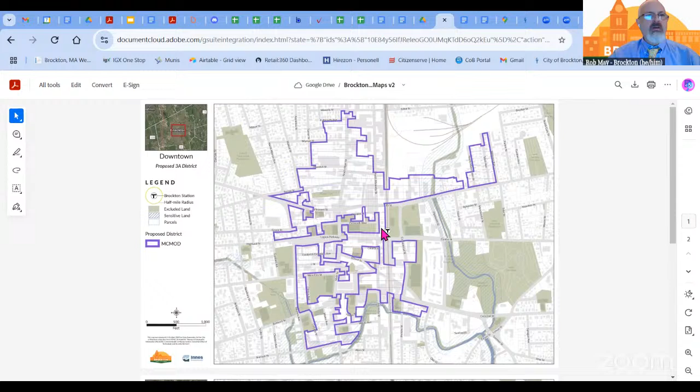And then in the Campello neighborhood, here you see the MBTA commuter rail station. And again, along in Campello, between Warren Avenue and the tracks on the east side. And then there's some property that spills over on the other side of the river, or other side of the tracks. Walkover Commons is right here to give you an idea of where we are. And this is the area south of Perkins Street.

Okay, so my question would be, let's just say as we move on with this, and even this is very similar to the form-based, correct, Rob? Essentially just doesn't have all the bells and whistles. The maps, yes, that's correct. So, what if we slowly start identifying other areas? How fluid are these boundaries? These boundaries will bring us into 100% compliance with the Commonwealth. We will meet our targets.

Form-based code, on the other hand, is something that is bigger and better. And so not only will we have downtown, the downtown Trout Brook and the Campello and the Southern Main Street corridor, we'll also see large chunks of the Montello area rezoned for form-based code, hopefully, and an area that we call Lovett Brook, which is the land around the Good Samaritan Hospital. The form-based code is written in such a way that it can be mapped in multiple areas in the city of Brockton, not just downtown. Okay, but right now we're just talking about the overlay district at this point. So that's what's in front of you this evening.

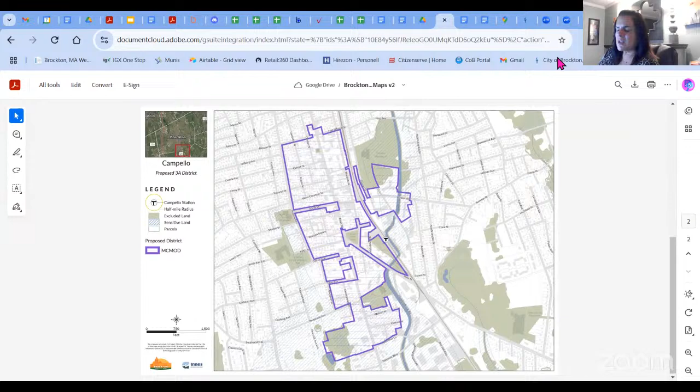Great idea, Jim. Thank you. Yeah, you come up with some good ones, Jim.

Appreciate it. Now, you said any additions or changes have to be added now, but you said that Montello would come in in the spring? Is that noted in this plan? No, to the overlay district, before council votes on it. If we would like to put the overlay district onto Montello, that would be a separate ordinance. And we could do that in the future, or we can wait until we map the Montello district for form-based code and come back at that later this spring. Okay.

All right, and the reason why there's a delay is that we started the planning process later, but the state has funded us to do the planning in that neighborhood. And we're doing a very extensive outreach to the community, have had several public meetings so far, and have gotten some really good community participation, which is what we want, because this master plan and the zoning should reflect what the community wants, and we're getting there rather quickly.

Okay. Any other questions from the board before we open up to public? Not me. All right, anybody with their hands raised? Madam Chair, we did take public testimony at the last meeting. I don't know if we didn't close the public testimony portion, but if people would like to make public testimony regarding the MBTA Communities Overlay District, please use the raise your hand icon, and we will unlock your mic and take comments at that time.

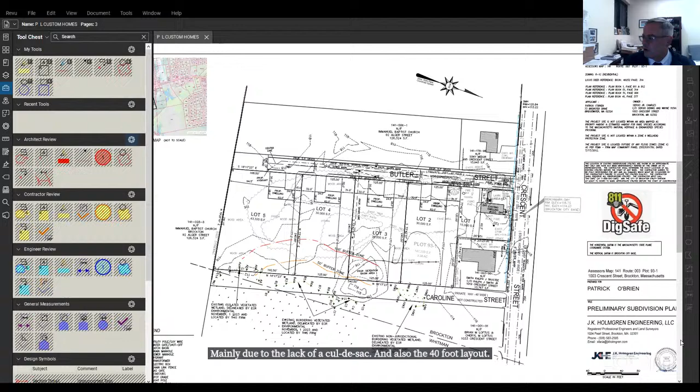So the plan that you see before you was the original plan that you folks gave us a blessing that held the 40-foot layout of Butler Street right across the top. We created 5 lots. The ZBA wasn't happy with it, mainly due to the lack of a cul-de-sac and also the 40-foot layout. We heard what they said and came back with this plan here that now has a 50-foot layout, still encompassing the existing Butler Street layout, but now widens it to a 50-foot and proposes a cul-de-sac. The lots are still substandard. They still have 125 feet of frontage and about 28,000 square feet. So we're hoping that you will see this change as a substantial change that addressed their reasons for denial and give us permission to give it a shot again at the ZBA, Madam Chair.

All right, thank you, Scott. Board members, questions? Yeah, I have one. What is the requirement for the street size? I know we increased it to 50. Yeah, so the roadway layout in the subdivision regs requires a 50-foot layout. So the requirement is 50. Yeah, the requirement was 40, now it's 50. 50. Yeah, which is what we have here. The issue we had previously with you folks back in the early summer was that Butler Street is an existing unconstructed way that's only 40 foot wide. So we're hoping just to keep the layout 40 feet as it was laid out back 100 years ago. So that was the plan that we showed you folks and that we went to the ZBA with.

So this one gets us back to a 50-foot layout as required, 34 feet of pavement as required, the 6-foot side, everything is exactly as required under your subdivision rules and regs, just that the lots are short on frontage and area. And as far as the cul-de-sac, is that up to par as well with the requirements for size? It is, it's a 60-foot radius cul-de-sac, which again is what's required. Okay, I have no other questions.

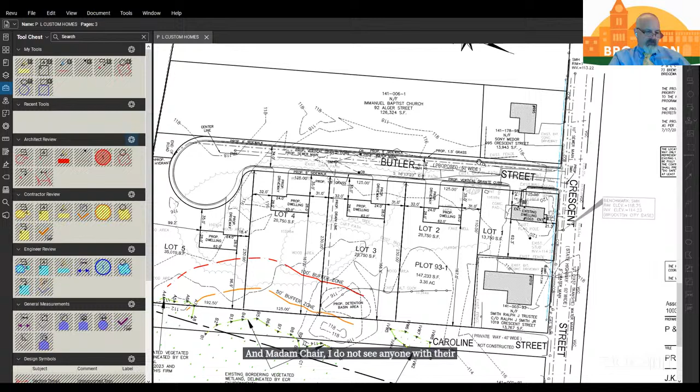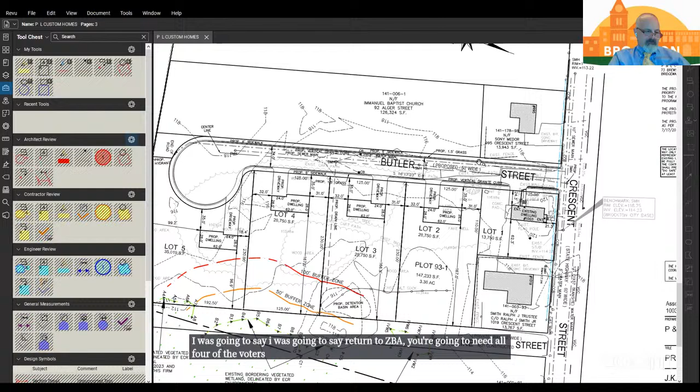All right. Is there a motion? Motion to approve. Second? All right, roll call. James? Yes. Matthew? Yes. I'm sorry, I was going to say, return to ZBA, you're going to need all 4 of the voters present. Okay. So I have a second from Matthew. Marty? Yes. Tony? Yes. Okay, there's all 4. Thank you, folks.

Madam Chair. Have a good night. You too, Scott. Thanks for the time. Thanks, Scott. All right, that was short. Scott's usually with us all night. We'll miss you. Thank you.

All right, the site plan review for 1380 Main Street. We have GM2 Associates representing. GM2, if you would have your party raise your hand so I can move you over. Mr. Baker. Mr. Sire. Mr. Pluff. Good Lord, you got a cast of thousands. Attorney McCluskey. Everybody should be coming over now. Madam Chair, all are in the room now.

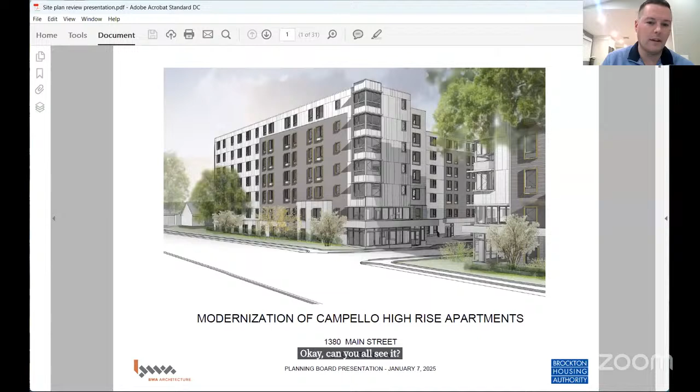Okay, can you all see it? Yes. Okay, great.

So the project before us is the modernization of Campello high-rise apartments. The existing is two 10-story towers, which is affordable senior housing, deeply affordable senior housing, containing 398 apartments. And the proposal is to replace it with three new 6- and 7-story buildings. And they will feature high efficiency systems and sustainable design features and modern amenities.

I want to note that this is deeply affordable senior housing and it will be maintained as such. The current residents of Campello Apartments will have priority and the right to move into the new development as it's completed. I won't spend any time on why we're doing this project. I will come back to that if you all have questions, but in the interest of time, I'm just going to move directly into more information about the project.

So what you see here is the site locus. The highlighted area in yellow is the site. It's about 6.2 acres. It is bounded by Main Street over here on the left, and it has a very small frontage on Plain Street to the northeast. The abutters are the BAT bus facility to the south. On the opposite side of Main Street is the Trinity Baptist Church and their parking.

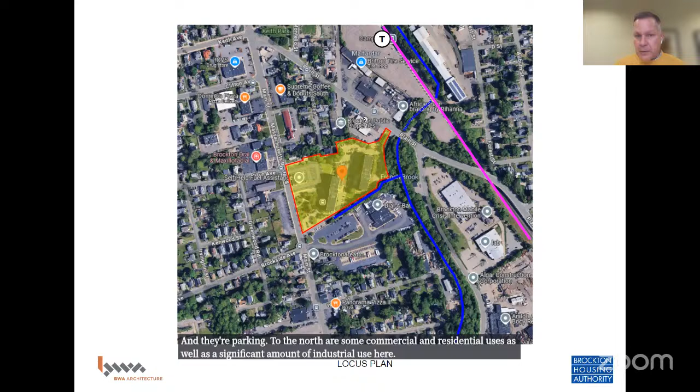To the north are some commercial and residential uses, as well as a significant amount of industrial use here, including a property owned by the city and Brockton Housing Authority here. And then to the east is the Salisbury Plain River, and it's heavily wooded, as you can see there. So that's the site context that we're in. I should note the site parcel includes 1362 Main Street, which is the old self-help fuel assistance building. And that parcel was acquired by BHA in order to make this project feasible.

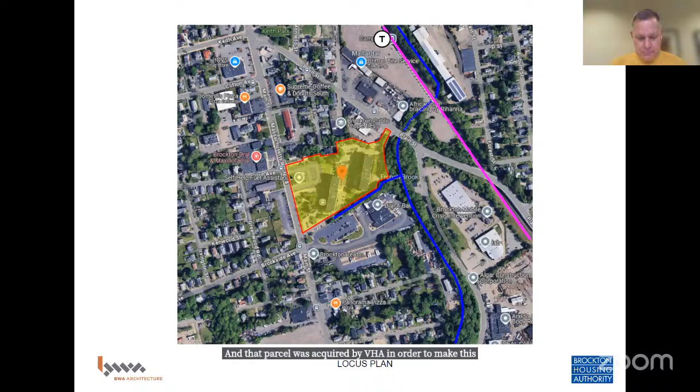There are a lot of lines on this. This is very busy. The only reason I wanted to show you this is you can see the two existing buildings, A and B. And this blue area here, outlined by this blue dotted line, is the floodplain. So as you can see, the entire building B sits in the floodplain. And this is a significant consideration for us as we moved forward with design, because we may need to make sure that we are fully out of the floodplain.

The siting is complicated by that floodplain, the fact that half the property is in the floodplain. We also need to keep the two buildings in service because BHA has nowhere to put these residents during construction. So we cannot tear down the buildings until we have new construction in place in which to accommodate those residents. And finally, as if that weren't enough, you see this magenta here is an existing city storm drain easement and outflow to the French Brook over here. And so all of those features presented significant constraints on the design as we moved forward.

So moving on, what you have here is the proposal for the new campus. As you can see, it is a total of 3 buildings, building 1, 2, and 3. Buildings 1 and 2 are aligned along Main Street. Purposefully, they're parallel to, and they essentially provide a street edge to Main Street. I will come back to that in a moment. Building 3 is essentially sited where it would fit. Given the other constraints that I already mentioned, we had very limited places where we could fit building 3, and building 3 is sort of nestled in between buildings A and B here.

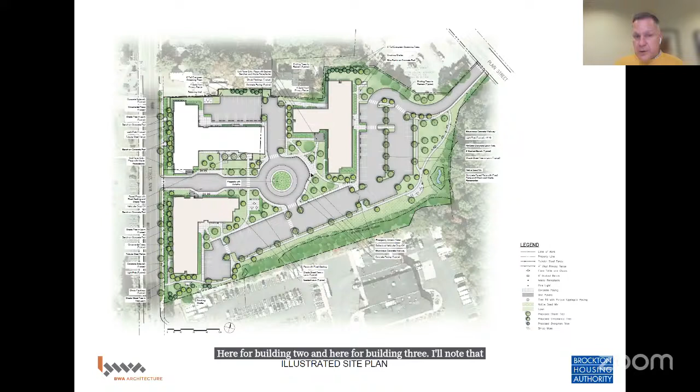The entrance to the property is off of Main Street. The primary entrance is this drive, which goes to a circular roadway here. And this then provides access. The main entrances to all three buildings are off of this drive, here for building 1, here for building 2, and here for building 3. I'll note that there's also a pull out here for a BAT bus stop to serve the residents. So this is intended to be the primary entrance to the site.

There's a secondary entrance off of Plain Street. This drive currently exists, and this is intended to be drop off and parking for building 3. While there is a connection through the site for emergency vehicles, we have provided for a gate here, the intention being that this gate would be kept closed to prevent this from becoming a shortcut from Main Street to Plain Street.

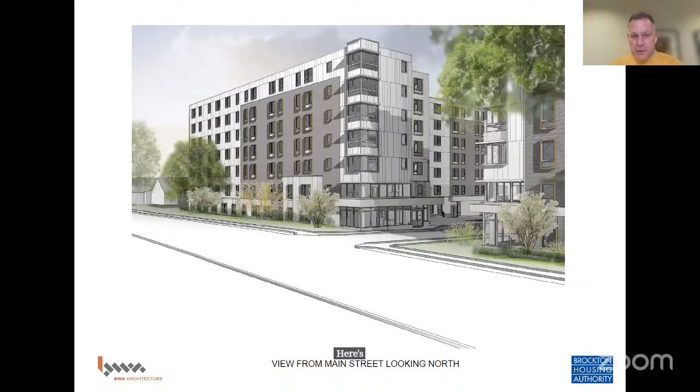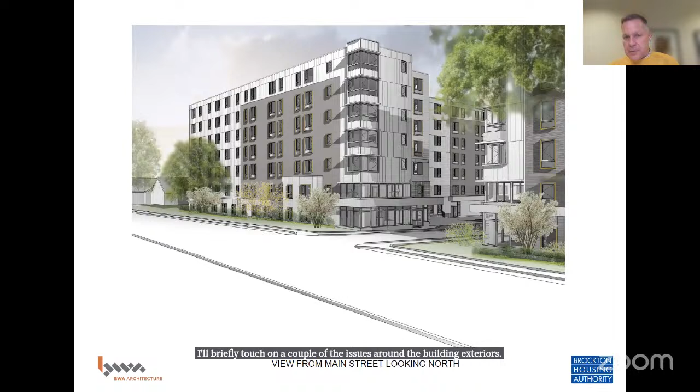Here's a rendering, an image of the property seen from Main Street. I'll briefly touch on a couple of the issues around the building exteriors. As I mentioned, the buildings are 6 and 7 stories. The 2 on Main Street are 7 stories. They are clad primarily in architectural concrete masonry down below and metal siding, 2 different types of metal siding, above. These materials were selected for their durability and their long-term ease of maintenance.

We chose several different materials in order to help break up the mass so that the mass of the buildings is more similar in scale to what's surrounding it, as well as providing different textures and shadow, and gives the buildings visual interest. So also note here, building 1 has this glass, what we're calling the turret or lantern on the corner. Building 2, which you can just see at the right here, has a similar matching turret. And the intention is that these provide a sort of welcoming entrance gesture into the site down that central drive that we mentioned before.

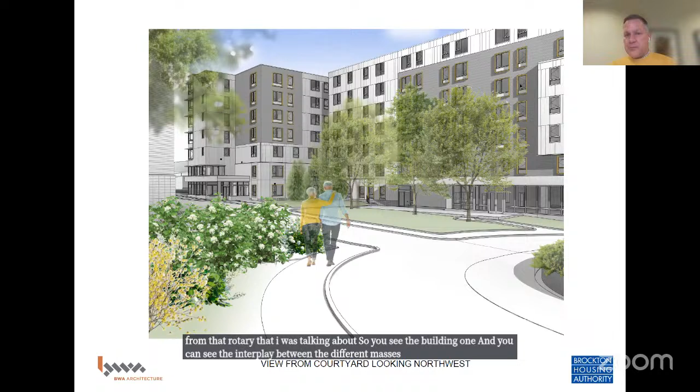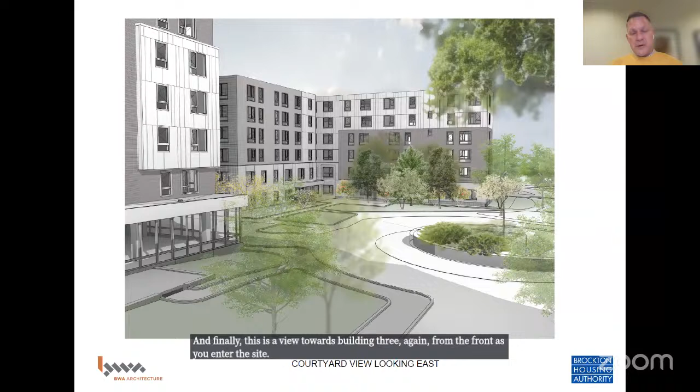Here's a view from the interior looking sort of northwest towards Main Street from that rotary that I was talking about. So you see building 1, and you can see the interplay between the different masses and the use of shadow boxes at the windows, again, to provide some depth, a little bit of shadow and reveal on the elevations, which you can see from the shadowing shown in the rendering. And finally, this is a view towards building 3, again, from the front as you enter the site, if you were in a very tall vehicle. So looking back towards building 3 and towards Plain Street.

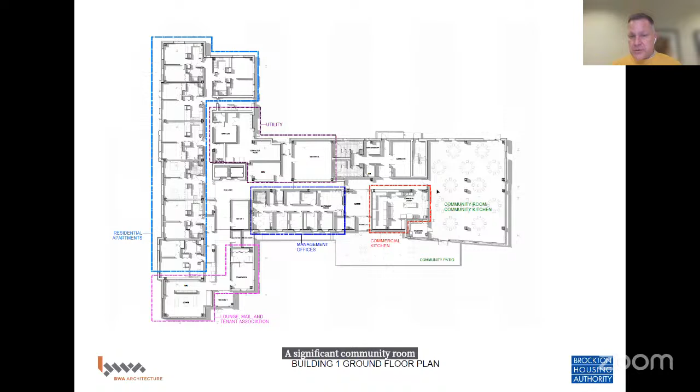Moving on to just very briefly on the architecture itself, this is the ground floor of building 1. And building 1 will have, in addition to the residences, a management suite for the Brockton Housing Authority, a significant community room and resilience center, both for the residents to enjoy, but also for the neighborhood in cases of heat or cooling emergency. And there will be a commercial kitchen provided in this space, which is intended both to serve the food provider who will provide essentially meals on wheels or meals on site for the residents of Campello Apartments. But the property is also sized so that it can be used to provide meals to other social service agencies in Brockton. So this is an amenity that we see not only to benefit the residents of Campello Apartments, but also the surrounding neighborhood.

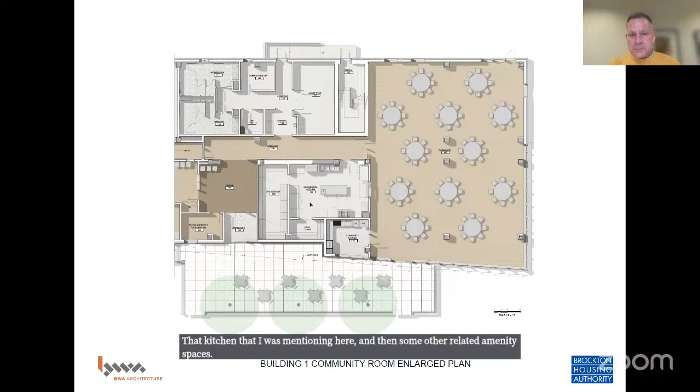Here's an enlarged view of that community room. So you can see a good sized community room here, intended to be able to provide space for much of the resident population at one time. That kitchen that I was mentioning here, and then some other related amenity spaces. Second floor of building 1, as you can see, second floor and up are really just identical, 1-bedroom apartments primarily. The proposal for the project is a total of 400 apartments, 398 1-bedrooms, and 2 2-bedrooms to accommodate people who may have special needs or a carer. And in addition every building has a lounge and elevator and laundry spaces as needed.

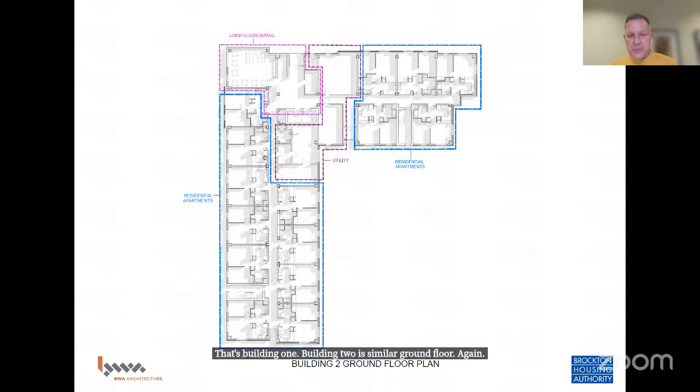That's building one. Building two is similar, ground floor, again, some lounge and amenity spaces, and then primarily residential. Building two, upper floor. Building three, similar, primarily residential and some amenity space, and upper floor is all residential.

Then finally, just briefly on a typical unit, this is the typical layout, one-bedroom apartment. All of the units on the property are either fully accessible or adaptable for people with accessibility issues. So this is what we would call an adaptable apartment, and so it can accommodate somebody in a wheelchair with relatively minor changes. So you have a kitchen here open to the living dining with an eat-in tuck under counter. So that kind of helps maximize the living space in the living room.

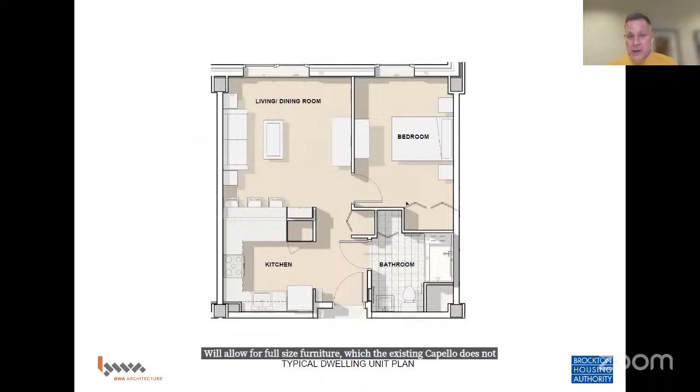Generous bedroom will allow for full-size furniture, which the existing Campello does not because the units are too small. And then a bathroom that is large enough to accommodate a wheelchair. So in terms of accessibility features, as I mentioned, all of the units have some accessibility features. 20 of the apartments will be fully accessible from day one. All of the common elements are accessible to people with mobility limitations.

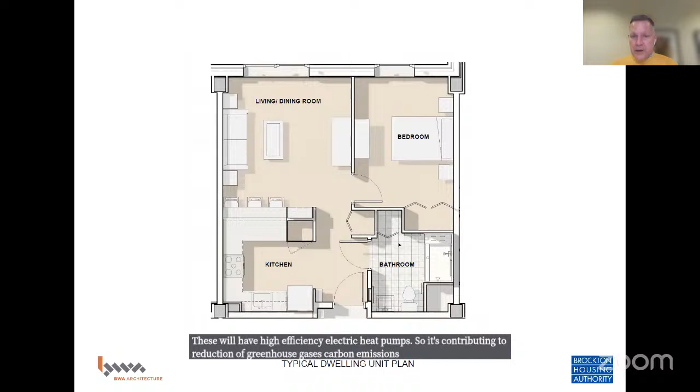Mention one other thing: highly efficient buildings. We're using triple glazed windows for high efficiency, high efficient envelopes. These will have high efficiency electric heat pumps. So it's contributing to reduction of greenhouse gases, carbon emissions. We are doing gas-fired domestic hot water, but it is being planned for conversion to electric when that technology emerges.

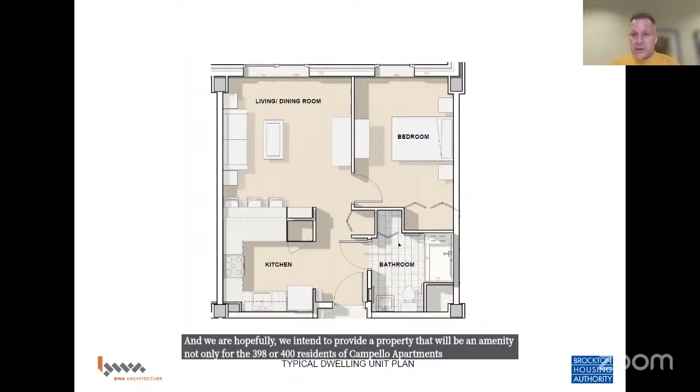So in summary, we're taking what we think is currently a liability for BHA, which is to say Campello buildings are in disrepair, as Attorney McCluskey mentioned, are in very poor condition and cannot be maintained because they're in a floodplain. And we intend to provide a property that will be an amenity not only for the 398 or 400 residents of Campello Apartments, but also an amenity to serve the entire community and the city of Brockton. And with that, I will leave it there and allow you all to ask any questions you may have. Thank you very much.

Madam Chair, if I may. Very nice presentation. I was going to ask first, Jim, what's phase one? Is phase one building three to accommodate the current residents? Phase one will be building one. The phases will be done in the order of the building number. So phase one is building one. And right now the intention, as John mentioned, we believe the financing is lined up to start building one construction, we hope at the end of this year.

Phase two would be building two, which is the second building south on Main Street. And that would start, we hope, about a year later, depending on financing. And then phase three would start a year after that. And the intention is that after buildings one and two are built, the old building A would come down. It might be easier for me to show; let me go back to screen sharing again. Did you leave the plan up? Also, do you see outdoor space for the residents, or I might have missed that. Sure, let me go back. There we go.

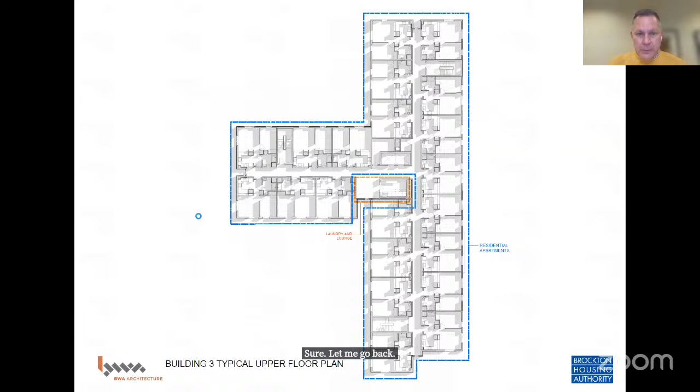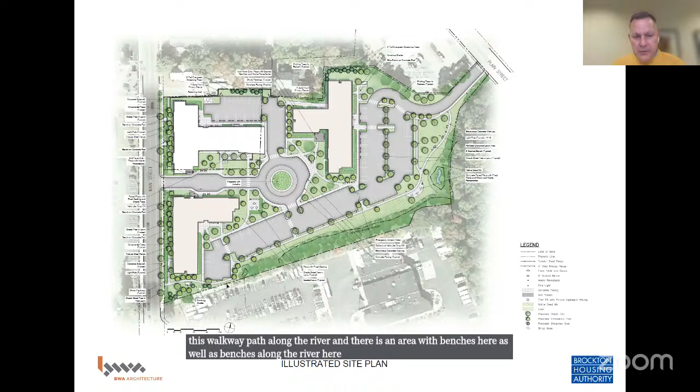So every building has some space for the residents of that building. For building one, there's a small area we intend will be primarily for smoking, but can be used by anybody. We also have a community terrace off of the community room. For building two, we have a space here as well as a plaza outside the back. Building three has some space here. And as I briefly mentioned, there is this walkway path along the river, with benches here as well as along the river, and some other space further up. So there's small gathering areas and places for recreation scattered around the site.

Thank you. When you started your presentation, you mentioned something about getting out of the flood zone, or you hope to. That's plan A. And when will you determine that, and what's the plan? Steve, go ahead. Sure. So as part of the plan, I don't know if I have a graphic up that clearly shows it. I don't know if I can share for a minute.

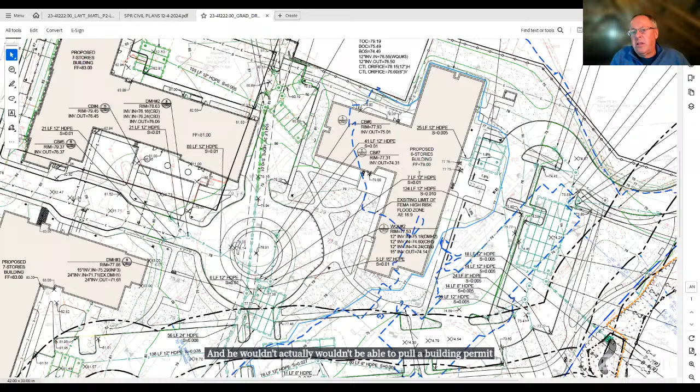So I've been working with Steve and his team to make sure that the building is compliant. And he wouldn't be able to pull a building permit for building 3 unless it was designed properly and out of the floodplain. All right, thank you. All right, I'll stop share. Jim, you had questions?

Yeah, I think we got to a couple of them. So this is 400 units. Is that what we said? That's correct. It's currently 398, and the proposal is going to be 400. So we're adding a few. So this is going to be staged in essentially 3 separate projects, right? It's 3 separate financing applications. It's this mixed financing, it's incredibly complex, but it is one contiguous site. It's being planned as one campus, but there will be individual investors for each of the three buildings.

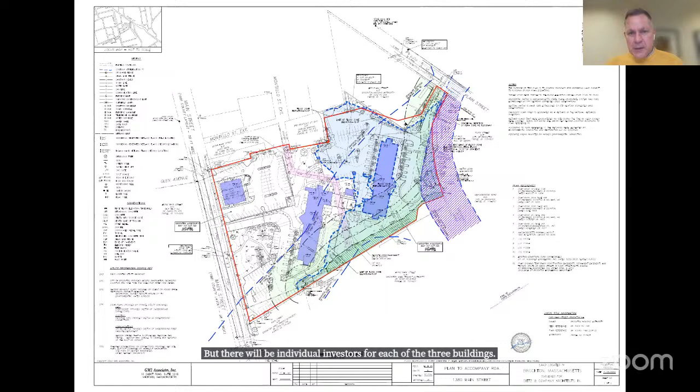Okay. So I guess what I'm getting at is, senior housing, we honestly can't get enough of it. There's such a shortage of all housing. So as we move on, is there any way, if it was in your budget, to add, say, even after phase one, if you wanted to, is that a possibility? Is that at all on the radar? Can I speak to that? Please, yes. I'm sorry, if I could respond to that. Sure, go ahead. So we are limited here.

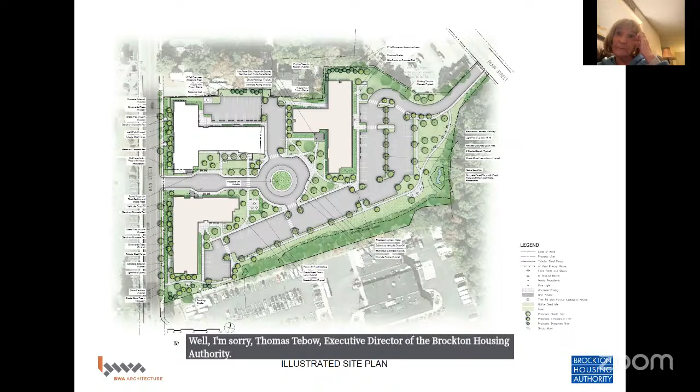We have actually tried to put some townhouses down along the road. For the record, can we get your name and position? Oh, I'm sorry. Thomas Thibeault, Executive Director of the Brockton Housing Authority. I apologize. We have looked at this site. It really will not accommodate any other units due to the issues that Steve Baker and Steve Sawyer spoke of with the water. The long-term plan, and this has been presented to the city, once we do this, this gives the housing authority the authority to move forward and build another 398 units in other places.

Our plan is to address some of our deficient state units, Kennedy Drive, Rainbow Terrace, and perhaps redevelop those and add units there. This is probably 5-10 years down the line, maybe beyond when I'll be around, but the plan is in place. We're working with the state. You are right. We have years-long list for seniors to come in. So we would like to see more units. The state would like to see more units. This lot will not accommodate it.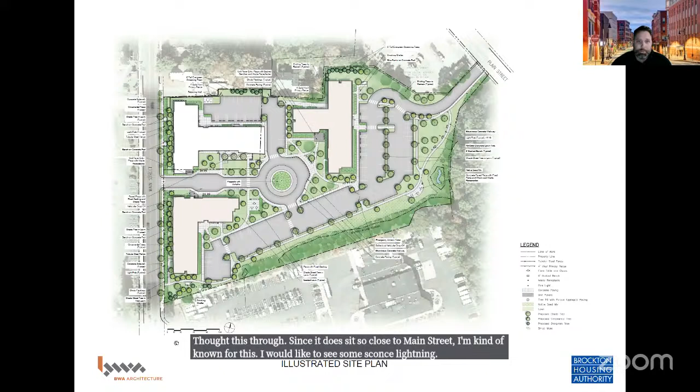Okay. I like the plan. I think you guys really thought this through. Since it does sit so close to Main Street, I'm kind of known for this. I would like to see some sconce lighting. That's about it. Otherwise, I think you've done the best with what you got. And that does it for me. All right, thanks for the questions. Madam Chair? Go ahead, Marty.

Mr. Baker, I have to tell you that my sister-in-law lived in this building, or one of them. I can't remember if she was in A or B. She's no longer with us for many, many years. And what a difference. This is amazing to me. The conditions she lived under were terrible. And my husband's also gone, her brother, and they would be thrilled to see these new buildings go up. So I just want to say thank you for such a nice job. They're beautiful looking. All right, thank you, Marty. Any other questions?

No, we'll open to the public. Oh, sorry, Matthew. Sorry. Yep. So just before we go, I just want to say I love the work that you guys did. It was obviously very well thought out and planned. The presentation was great. I just do have a few questions regarding the current tenants. And I know that you said that they wouldn't be displaced, but with the new buildings come higher costs. Will there be higher, I don't know if it would be rent or what they'd be paying, but would that go up with the new buildings?

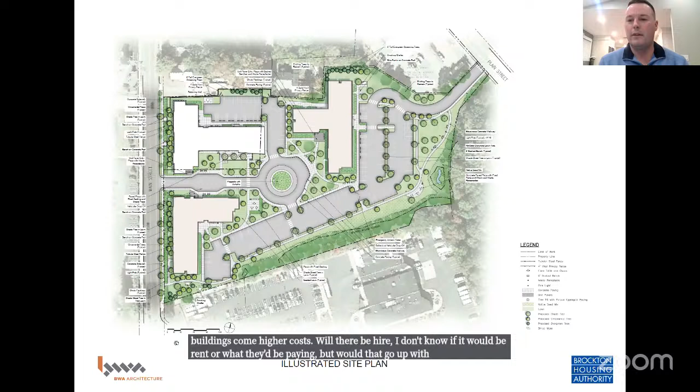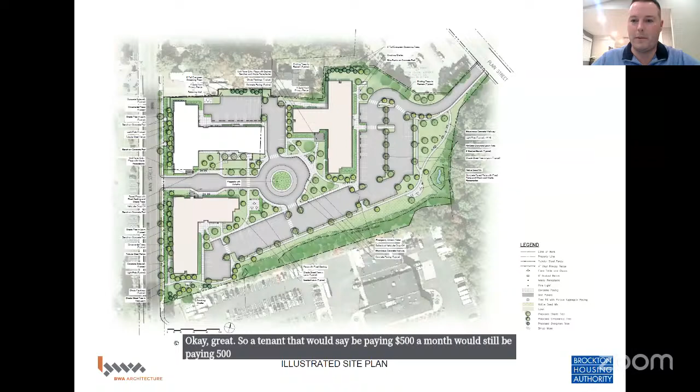I can respond to that. I'll defer to Mr. Tebow. Thank you, Steve. No, so HUD is involved in this also. They have issued tenant-based vouchers that will be project-based into these units. The people will pay 30% of their adjusted gross income just as they do now. Okay, great. So a tenant that would say be paying $500 a month would still be paying $500 a month for a new apartment. It would just be based off their income. Correct. Okay, and the current tenants have first right of refusal for the new apartments.

Correct. And I do want to address another reason we're doing this. The cash flow through the tenant-based vouchers is much higher. It allows us to care for these units. And so we have plans to replace the electrical systems, and Steve can speak of it, we've been through this for so long, and we have a pro forma that does that. Current public housing does not do that. So this is a long-term plan for affordable housing in the city that I think we can be proud of and not go begging hat in hand for every dime we get to make sure that they comply with the state sanitary code, which is what we're doing now.

Wonderful. Yeah, I think this is great. Sorry, someone said something. And then I know that you had mentioned that 20 or 22 units are going to be handicap accessible from the jump, and then others could be modified to become more accessible to people. At whose cost would that be? Any adaptation required by a resident, I believe, would be at the housing authority's cost. Tom, is it? That's absolutely true. We do it all the time now. Reasonable accommodations, we do. Mr. Plouffe, I think, is on the call. He's our officer. We do them daily. Great. And those are all my questions. And I just want to say that I'm very thankful that these types of programs exist for elderly people. Thank you, Matthew. Okay, open to public.

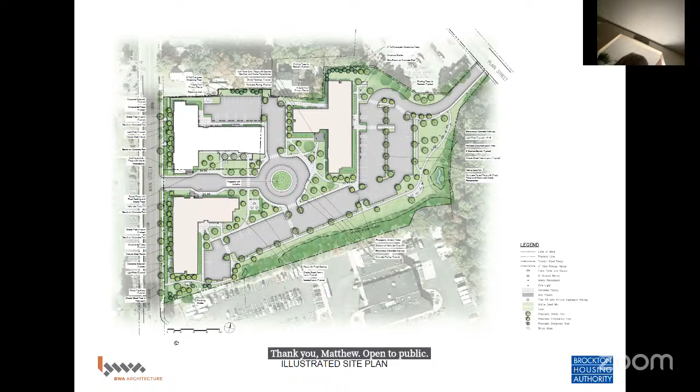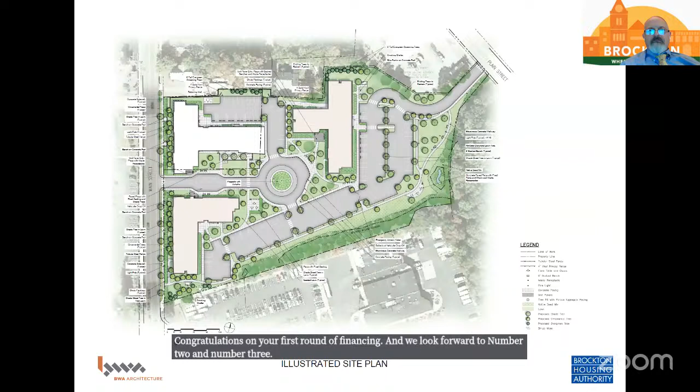Ladies and gentlemen of the public, if you wish to make a comment on this site plan review, please use the raise your hand icon at the bottom of your screen. And Madam Chair, at this time, I do not see a raised hand. Right. I do have to say for the record that the city's Department of Planning and Economic Development has been working with the Brockton Housing Authority for several months on this project and are very excited to see it get to this stage. And congratulations on your first round of financing. And we look forward to number 2 and number 3. All right, thank you. Is there a motion? Not yet. Motion to approve.

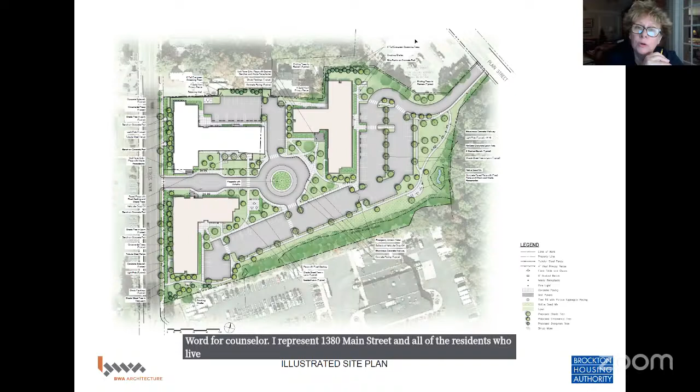Hang on just a second, Councilor Nicastro would like to speak. Thank you. Let me interrupt your motion for a moment, Mr. Gallagher. This is Susan Nicastro, Ward 4 Councilor. I represent 1380 Main Street and all of the residents who live there. That's actually where Ward 4D votes when we have elections in the city. And I just want to say how fervently I support this, and I'd so like you all to support it as well. I go there and the buildings are past their prime and then some, and I'm being kind. And the idea that we can have these 3 buildings and parking space and walking paths and maybe even a garden, since some of the people are losing their balconies and like to grow things on their balconies in the warm months, is just stupendous.

I had two questions. I'd like to know the number of elevators per building, and I'd like to know how, if any, the size of the units is changing from the existing buildings to the new buildings? Sure. If I might answer, there are 2 elevators per building, which provides some redundancy in case one goes down. Okay. Right. And the units are, Michelle, they're definitely larger. I believe they're about 5 to 10% larger. Michelle, do you know? Steve, 25% larger. Oh, 25%. I'm sorry. Forgive me. Senior moment. So they are significantly larger.

As I mentioned in my presentation, the bedrooms in the existing units don't accommodate a full-size bed. Right. And as I showed you in the unit plan, we can do that now. There's space for a wheelchair turnaround in the bathroom and in the kitchen. So even the units that don't start as accessible can be adapted. So the units are larger.

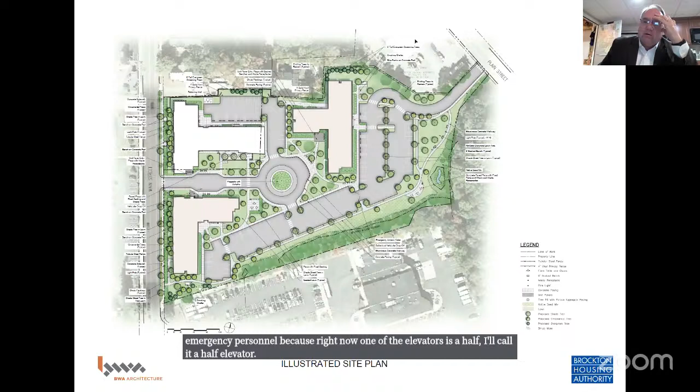That's terrific. If I could address the elevator issue, so it's 50% more elevators. All of the elevators are full size, which the fire department and emergency personnel would appreciate, because right now one of the elevators is, I'll call it a half elevator. It does not accept a gurney. Why anybody designed the last one that way, I don't know, but it's a significant benefit to everybody, the first responders and the residents who are being responded to during emergencies.

Global warming has had an impact on the Salisbury Plain River, and that is what has changed the floodplain. And there's been terrible flooding there. The first floor of Building B has been impacted. I think some of the electrical was impacted at times. We've been very fortunate that the buildings are still hanging in there. And so I'd be so grateful if you would support this. Thank you for the opportunity to speak. All right, thank you.

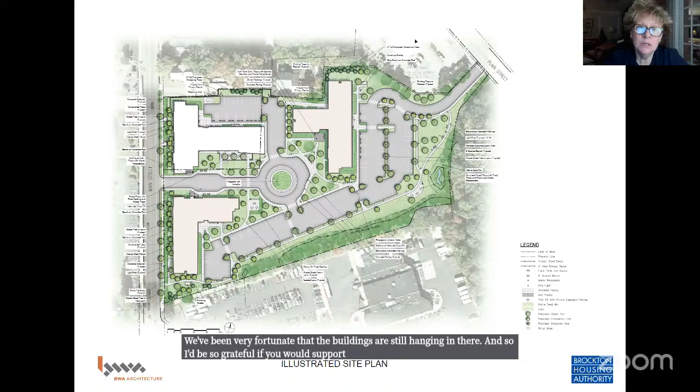We're starting with the motion. I will restate my motion to approve with standard conditions, in addition to the following condition: the project must pass through site plan review prior to beginning both phases 2 and 3. On the motion, can we add the sconce lighting to the front of the building? Yes, also with sconce lighting in the front of the building. Second. Okay, roll call. James, yes. Matthew, yes. Marty, yes. Tony, yes. All right, thank you.

Thank you. Thank you so much. Thank you all. Thanks, everyone. Wonderful job.

Next up, we have another site plan review for 1005 Belmont Street, Joyce Consulting Group. Who's representing for Joyce Consulting Group? Is that John McCluskey? Yep, you've got your hand raised. You're doing good, and we can hear you. This is the roadway project? It is, yes. You ready for me? We're ready. Okay, thank you very much.

This is the project for the old Carlton House, presently owned by Father Bills. We have a strong history at this property. We presently have 69 single-person apartments for permanent housing for the homeless. My office happens to be right down the street at 1325 Belmont Street. I go by this property day in and day out, and I've seen how this has been developed. What we're looking for tonight is approval of an additional building for 29 single units. This is allowed under the so-called Dover Amendment, and as not a resident of this neighborhood, but as a user of this neighborhood, I see this as a great use for this property.

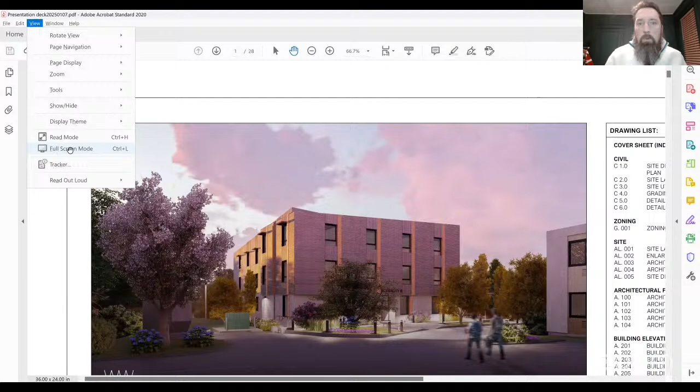Okay, so as Attorney McCluskey had mentioned, this proposed project's at 1005 Belmont Street. It's right at the intersection of Belmont Street and Coolidge Street, right by the on-ramp of Route 24 north. It is on the same parcel as the Roadway Apartments. So this is the existing Roadway parcel building, and the proposed building will be in this location.

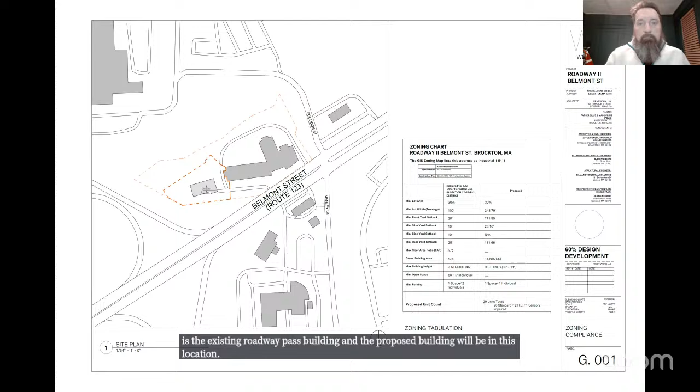Here's another aerial view of it. So the proposed location is in the area of kind of underutilized parking area to the eastern corner of the site. This is another view of it as well. The site currently has a 69-unit supportive housing building on it, with over 100 spaces. So it's a 3.25 acre lot, and the lot slopes to the rear. There's wetland in the back that you'll see in the next plan.

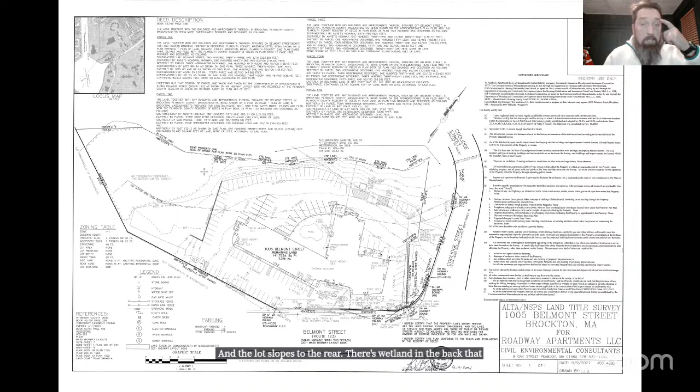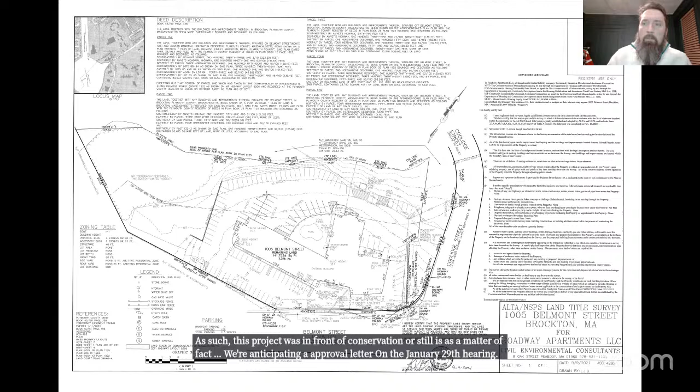So the entirety of the site slopes to the rear, and all the stormwater runoff ends up ultimately in the wetland area. As such, this project was in front of conservation, or still is, as a matter of fact. So we're anticipating an approval letter on the January 29th hearing. We've had it peer reviewed by Beta Engineering, and I believe we've addressed all their concerns.

Oops, sorry about that, went the wrong way. So this is just the proposed demo plan. It gives you an idea of, we'll be removing all this asphalt. Some of it in the upper level will be going back in place, but the lower level will be just building footprint, and outside of that, it'll be restored with a wetland restoration mix. So overall, the project will result in a decrease in impervious area of about 7,500 square feet.

We'll maintain the same access points to the parking area from Belmont Street, and there's an easement off of Coolidge Street as well. Circulation kind of works around the building, and the proposed building would be this location here. It's a 3-story, 29-unit building. Originally, when we first submitted this to technical review back in May, it was a 31-unit building. It was a little bit closer to the wetland area.

Technical review's comments were to create a more substantial stormwater system, add a fire hydrant, and get conservation's blessing, start that process. So we've done those things. There was also a couple other minor things. We had a gravel driveway that we removed and paved a portion of it just to access the generator. So those were the main things that we heard from technical review.

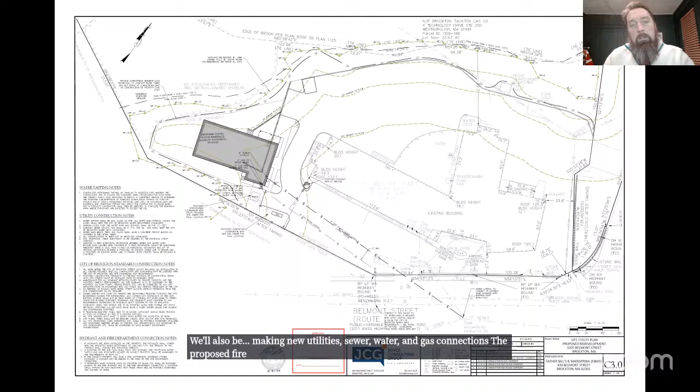We're proposing, as you can see, a substantial stormwater subsurface infiltration area. We're also adding catch basins throughout the site in order to catch runoff from the entirety of the site. The stormwater runoff will be decreased by 40% in all storm events, in accordance with the stormwater bylaw. We'll also be making new utility, sewer, water, and gas connections. The proposed fire hydrant is here. There's actually an existing hydrant as well on Belmont Street, right here.

And then this is the on-ramp area here. There is actually a fair amount of vegetation after the property line before the on-ramp. So that's really the extent of it. The building will be ADA compliant. Is there anything else I'm missing? We have a landscape plan here. There'll be substantial plantings in the front. There's actually a second sheet to this landscape plan I didn't include, but there's a landscape island in front of the existing building.

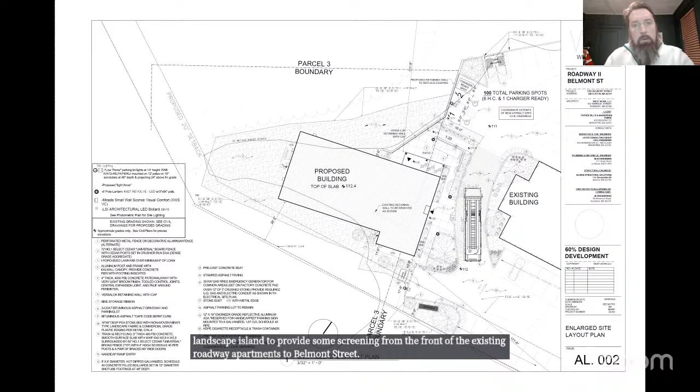And technical review at the last meeting had asked that we put some more substantial screening plantings in there. So we've, I believe, put a lot of arborvitaes across the entirety of the landscape island to provide some screening from the front of the existing Roadway Apartments to Belmont Street. So with that, I will pass it off to Mike Murata of Westwork, so he can give you a rundown of the building elevations.

Hey everyone, I'm Mike Murata from Westwork Architects. So I'll just take you briefly through the elevations and the renderings that we have here before us, and I can also take you through the plans quickly.

So your first view, number one, is the entry view, and you can see to the right-hand side the existing Roadway 1 building, and then to the left is our new proposed building. It's a mixture of two siding materials. There'll be a metal cladding and a cementitious siding, and that's to break the volume up to make it look like two distinct volumes. And you can see that in the image in number 2.

That's the north elevation. Almost if you were on Belmont Street, that is the view you would see. Of course, there's a lot of screening already there on the site. The rendering number 3 is the back part of our building. That is the northeast view. There you can see we've added also a CMU base. So we'll have a hardy base at the first story, and then there's the cementitious siding above.

Image number 4 is the covered patio that we're providing for the project. That'll be just off of one of the accessible entries. And that's a metal and Kalwall system for the canopy. The building also overhangs, and that allows for the bike racks to be covered also near the handicap accessible entry.

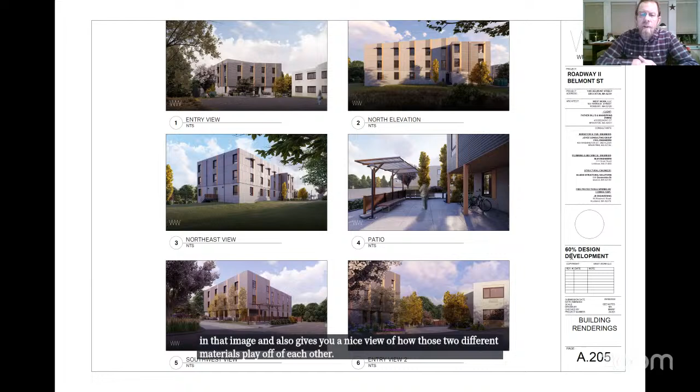The image number 5 is your southwest view. That's looking back as you are turning around the corner of the building into the additional parking area. And there you can see the covered patio in that image, and it also gives you a nice view of how those two different materials play off of each other. And lastly is image number 6. It's a little bit of a close-up of the two buildings together.

And this, you can see existing, it's that whole asphalt parking area. And now you get a sense with the additional building and with the additional landscaping and trees, it starts to break it up. It gives it a much more residential feel, and it's really a nice complement to that existing building. Right now, it's just an unused piece of asphalt parking area. So Mike, the next slide.

Here's the first floor plan. You can see the site plan attached to it. The first floor is 9 units. It has 1 handicap unit, 1 sensory impaired unit. It has a pretty small common area. It has a small meeting area, residential office, as well as a common laundry and a lobby with a mail area. It's a 3-story building, but we are going to provide an elevator for the building.

Each unit is typically just under 300 square feet. Each unit will have an adaptable bathroom, a small area for a bed, and then a little kitchenette. And that's a total of the 300 square feet for the studio efficiencies. The handicap units are slightly larger, a little bit over 300 square feet. Mike, you can get the next slide.

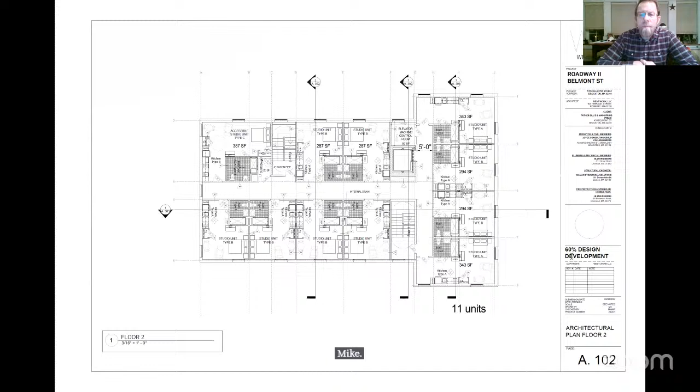It's the second floor, and it'll be typical for the third floor as well. It's 11 units, and pretty much the same units flow across the building. They're very efficient. They're well laid out, and you get 11 units on each of the next floors. Mike, you can hit the next slide. That's the third floor, which is generally the mirror of the floor below. And the next slide is the roof plan.

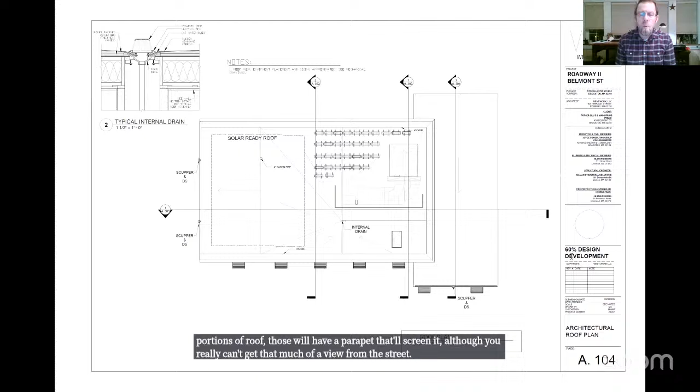The roof plan, we have two different roof pitches. It's a solar ready roof, and the condensing units that will be proposed on top of the flat portion of the roof, those will have a parapet that'll screen it. Although you really can't get that much of a view of the roof line from the street, we're still going to screen it for anyone that's walking on the street. And next slide.

Thanks, Mike. Good evening, everyone. John Lanham, the Chief Operating Officer at Father Bill's and MainSpring. They already went over the project for the facility.

The only piece I would add is that we're really excited about the opportunity to continue to develop permanent supported housing for individuals who have experienced homelessness in the community, and provide long-term efficient places for people to live. And we really like this style of building to be able to provide private, safe space for individuals to have their own kitchenettes, their own bathrooms. It's not a rooming house, it's not a shared living facility, but really is their own apartment, so they can move forward with their life.

So, as Mike had mentioned, there will be case management that's available for the participants in the building. With the office space on site, we will also have 24/7 operational staff on site to support the guests or the tenants with whatever they need for the stabilization in their units. And just really looking forward to moving forward with this project, and happy to answer any questions that you have.

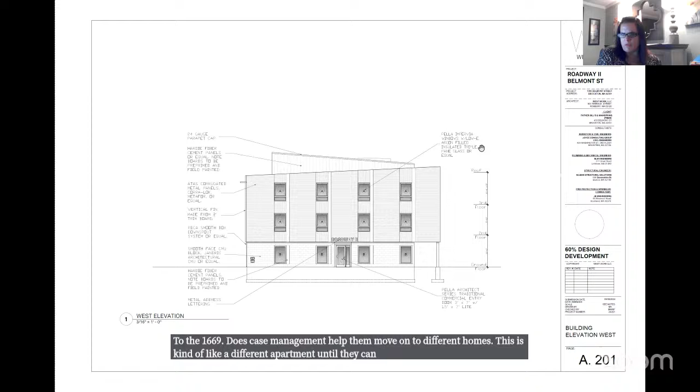Well, thank you all, gentlemen. Very nice presentation. Definitely another strong need in our community. I'm just curious. So there's long-term residents. This is another 60, did you say? 31 units to the 69. Does case management help them move on to different homes? This is kind of like a transition apartment until they can, because we have a greater need than just 31 more units, which will take this, but we need more.

Yeah, this housing is targeted for the people who have long shelter stays, often have disabilities, whether it be mental health concerns, medical needs. So it's really meant for the people who may be stuck in shelter for a long period of time. But the case managers absolutely work with people on housing plans for after this location. We just don't put a specific transitional timeline to say you have 2 years. But part of the housing plan for every individual in our housing is to look at what is the next appropriate housing opportunity for you.

Some of the people that are in our housing are there for 20 years. Others move on very quickly to their own fair market rent or their own other subsidized units as they're able to. And so when you say subsidized for this type of level of living, who actually pays for this? So we get the funding either through HUD or through MRVPs for subsidized housing for those units. We have our state application in now, so we'll be working with the state on what funding sources will help support the units there, but the individuals who are coming into these units will pay 30% of their income towards rent. Okay. All right, very good. Excellent. Thank you. Questions from the board?

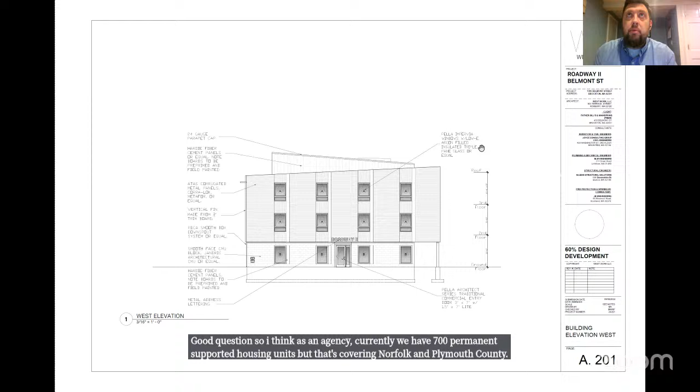Yeah, Madam Chair, if I could. So I guess collectively in Brockton, how many total units once the Main Street building closes will there be from Father Bills? Good question. So I think as an agency, currently we have 700 permanent supported housing units, but that's covering Norfolk and Plymouth County. I would say in Brockton, for permanent housing units, we are right around 200, I believe.

Okay. And you just mentioned the area that you cover. So is that average out more or less than other areas that you're servicing? So our main hubs of activity tend to be Brockton, Quincy, Weymouth, Plymouth. Those are the cities that we have the highest density of housing at the moment, but we do have units in Hingham, Wareham, Stoughton, really looking at both counties to look at where's an appropriate place for individuals that would like to be housed in those areas.

Okay, and that leads me to my next question. After this, what other projects are on the horizon? Is there more to come for Brockton, or are you going to disperse it throughout other areas? Our pre-development pipeline is looking at other areas. So we're currently working on a project in Quincy with one of our property management companies and development agencies. We're going to be starting a demolition of a project in about 2 or 3 months in Stoughton, converting a former motel there. So we are absolutely looking in other communities as well.

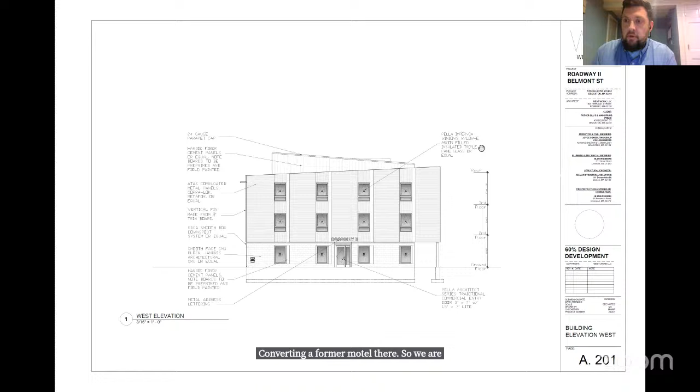Okay. Is there a success formula with how many people in need in one place? It seems to me that if you had a bunch of people trying to maybe recover or get on their feet, having a larger population might not be the best idea, or to kind of hang around the wrong influence. This is your business. Does that have any impact?

We've not seen it that way. We actually like this size facility. You know, the 30 to 35 unit facility tends to do really well for consolidating the staff who can be on site to support those individuals. But also, what's great about these units is that everyone has a door they can lock. They have their own unit. They can engage with one another in common space as they would like, but they also don't have to share a bathroom or a common kitchen the way some of the older rooming houses are set up.

So it does allow the tenants to kind of choose how much they want to engage with their neighbors or the people that are around them. But we do find that there is quite a bit of support that they provide to one another, with connecting to resources, making sure that they're supporting each other, sometimes just giving a ride to someone or just for social engagement.

Okay. And I noticed through the plan, there's a very small common area, which leads me, the representation said that this falls under the Dover Amendment, and I'm imagining it falls under the educational requirement, maybe. So what is the educational requirement with very little recreation space or common space? Or what are we doing there in terms of education?

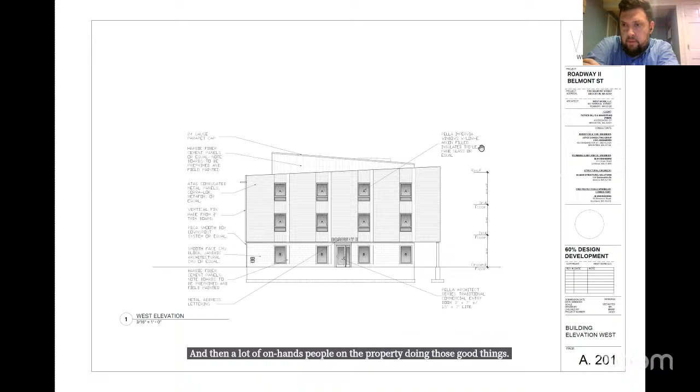Yeah, the only other piece I would just add to that is when we talk about case management, for us, it's really looking at what are those skills for independent living that we need to help that person identify. And for some people, that might be cooking classes. If you've been in a shelter for many years, and you now have your own kitchenette to cook in, okay, let's talk about nutrition. Let's talk about how to budget your money to buy the appropriate food as needed.

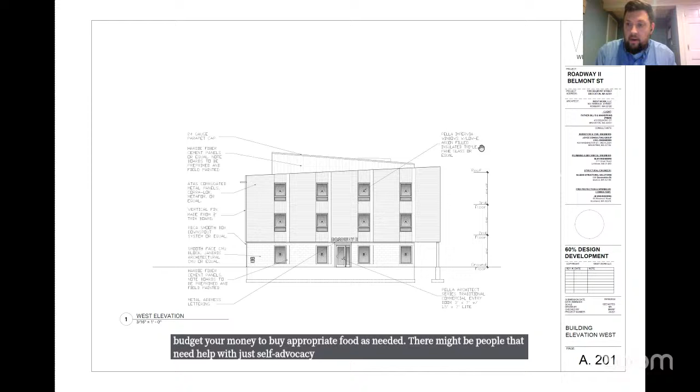There might be people that need help with just self-advocacy, getting the right connection to medical resources, getting set up with the right employment services. So for us, we very much look at what does that individual need for their stabilization, to ensure that they can remain safely in this unit and then hopefully move on to other housing in the future.

Okay, and how many units are currently there in that first building? 69. 69. So you just said the sweet spot was about 35 that you like to service. Is this going to be stressing the resources that are currently there? No. And remember, Jim, I mentioned the Dover Amendment, and that's a statewide statutory item under Chapter 40A, Section 3.

And Brockton also has its own ordinance that speaks to this exact type of living. We've had meetings with the Brockton Building Department just to go over everything that we're doing, and they're fully satisfied that what we're doing here is in compliance not only with Chapter 40A, Section 3, but I believe it's 20. I don't have it in front of me. It's 27-29, or I believe it's 27-23, the Brockton ordinance, which is almost identical to the Dover Amendment.

Well, I ask these questions because we want people to succeed. Obviously, we want your plan to work. So it's reasonable to ask, is this going to be effective? And is it going to be stressing the seams? So that's why I ask. Oh, I appreciate the question. Nobody faults you for that.

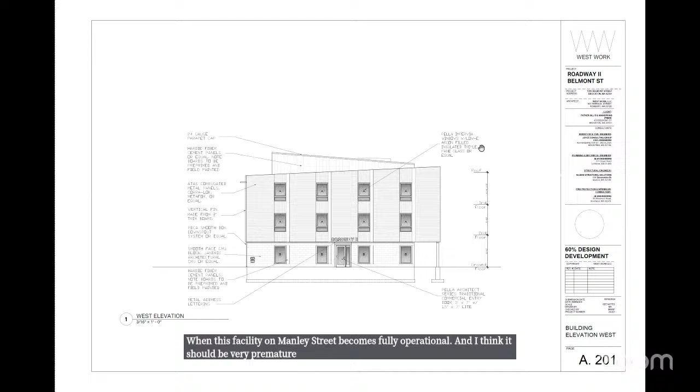And we really don't know what type of mitigation may be needed when this facility on Manley Street becomes fully operational. And I think it would be very premature to give this the green light to get going until we really understand and see if there are any.

May I comment on that? I don't think you need to just yet. Maybe after. Is there anyone else who wants to speak? Mr. May? Ms. Stevens, I'm going to open up your microphone while we try to figure out what has happened to Councilor Griffin's feed. So Ms. Stevens, you should be able to address. Yes, ma'am. Can you hear me? Okay. Yes. I have the same issue.

Manley Street hasn't even opened yet. We don't have sidewalks for pedestrians. I myself, I don't go anywhere. I am rarely out on the roads. And twice I almost hit somebody that was crossing the street from that hotel or from the new roadway project to the Mobil station. And I know I've heard of other accidents. Something needs to be assessed or dealt with regarding the foot traffic.

And I understand only 10% of the population have a vehicle, which doesn't congest the traffic light pattern, but the foot traffic is an issue. And I'm concerned about the Manley Street traffic as well. I want to see the projects succeed. I want to see the shelters be available for those that need them.

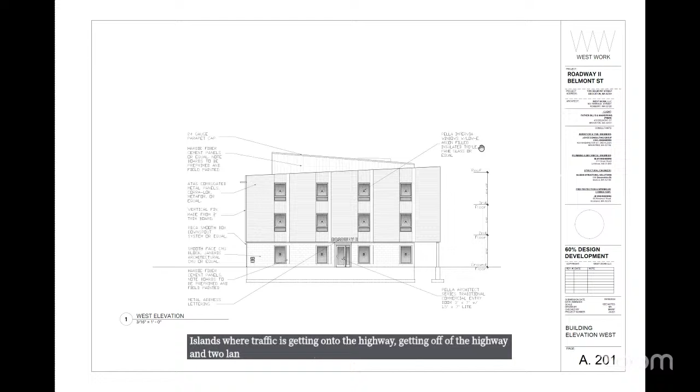But I think we need to keep these people safe, and them walking across the street where there's no crosswalks. And I'm literally saying they cross over the islands where traffic is getting onto the highway, getting off of the highway, and two lanes of traffic going in either direction. It's dangerous. So please, address those issues before you just say, go ahead. That's all I have to say. Thank you. Well, these are adults crossing the street, not safely. That's my main issue, yes.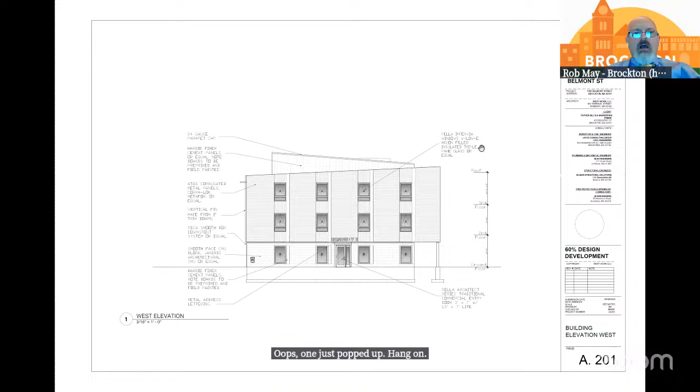Any other hands up, Mr. May? Ladies and gentlemen, if you wish to speak on this project, please use the raise your hand icon. And Madam Chair, oops, one just popped up. Hang on. Pat Jacobson, hang on just a second. You should be able to speak now, Pat.

Thank you. I'd like to direct just a couple of comments or questions to the manager of the facility, or from Father Bill's, if he's there. Can you hear me? I can. Okay. You've had some experience now with that location. What's your experience been so far? Have you had a lot of community complaints about the facility generally, and how have those been handled?

Honestly, no, we've not had many calls or complaints from the community about the people who are there. Overall, I think it's been very successful, with 69 individuals who have been living there in their apartments. We've had many that have been able to move on to their own independent housing from that space, accessing case management and really doing some great work there. I think compared to how it was operating when it was a motel, it's a much quieter site than it has been in the past.

And certainly it's providing permanent tenants who have a vested interest in that area and that community. We have staff who are on site 24/7 in that building, and we do take concerns seriously. So if we get a call that there's a shopping cart that's left out front, or maybe too much congregation, we do talk to the tenants about that. We do want to make sure that the building presents well for the neighborhood, fits the mold of what Brockton would like to see in that area.

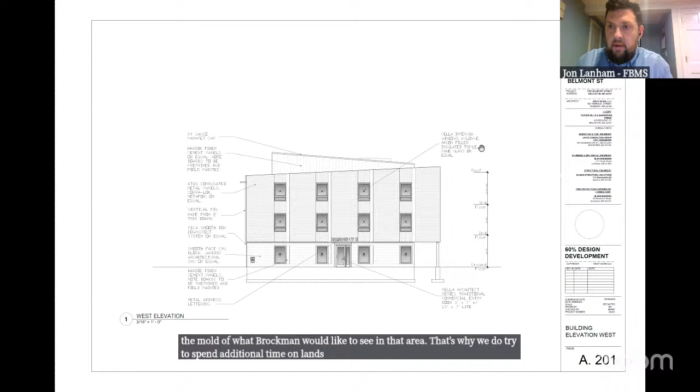That's why we do try to spend additional time on landscaping plans and the exterior of the space, because we really want it to be a welcoming, nice space for both our tenants and for the neighborhood. And you have obviously mentioned several times you have 24/7 staffing. I'm assuming if there's a community issue that they'd be readily available to talk to people in the community if some problems do arise, which they can, obviously.

Sure. We have staff on site in the lobby that you could certainly speak to if there's concerns, but also our administrative office is right down the street at 430 Belmont Street, where we're happy to talk to people if it's more business related that we could address from the administrative team. And just one final question. When do you anticipate that the shelter will be opening on Manley Street?

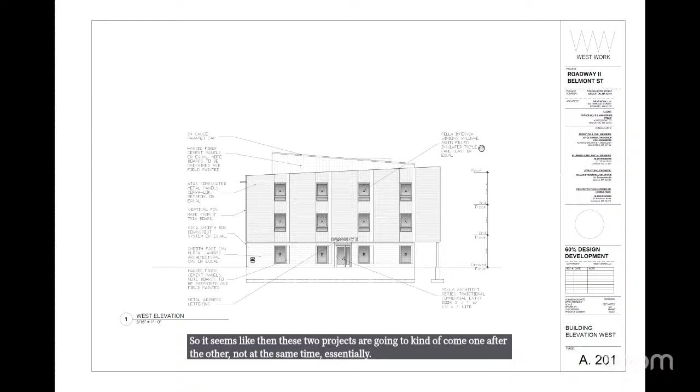We're currently looking at a springtime opening at the moment. We are working on that. The project is getting very close to opening now. We are waiting on some switch gear to come in that has delayed the project slightly, but we are hoping for a spring opening. So it seems like then these two projects are going to come one after the other, not at the same time, essentially. Correct. Okay. All right. Those are my questions. Thanks so much. Thank you.

May I make a couple of comments? Sure. Just let me add, because I live in this area, and so I'm at that light often. I think that this is a great need. It's not a really densely populated area. It's in the woods next to a highway. I do hear Veronica's concern, though, if people are trying to cross the street to get to the Mobil. So if you have rules for the tenants when they are afforded an apartment, you should take that into consideration. I don't think a crosswalk or anything can be put there; it's already congested enough.

But Attorney McCluskey, what would you like to add? Nothing we haven't already heard, because it's a really good plan. Thank you. First of all, I don't know exactly how many years the existing 69 units have been there, but I go up and down Belmont Street all the time, and I've never seen anybody crossing Belmont Street. And there are sidewalks going east and west from this project over the highway, and then off east down into the business community. And so we've operated successfully there for many years, and this is an increase in the number of people, but that should not indicate any comparative increase in problem, because there is no problem at this point.

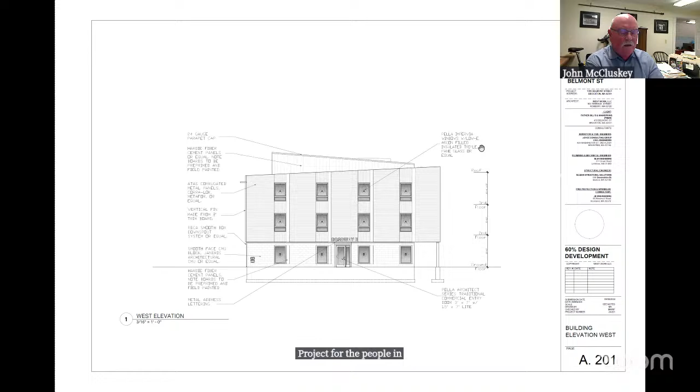This is a great location. It's a great project for the people in need. We're a community of over 100,000 people, and my practice, by the way, is not criminal. It's not going to court. It's helping people with their day-to-day living problems and planning. And I can't tell you how many families I see with homeless individuals. It's saddening. And this is a great thing for the city of Brockton to take and help these people. It is. And when people are asking about the Manley project, that Manley project and this project are separate, so we should save that for when Manley presents in front of us.

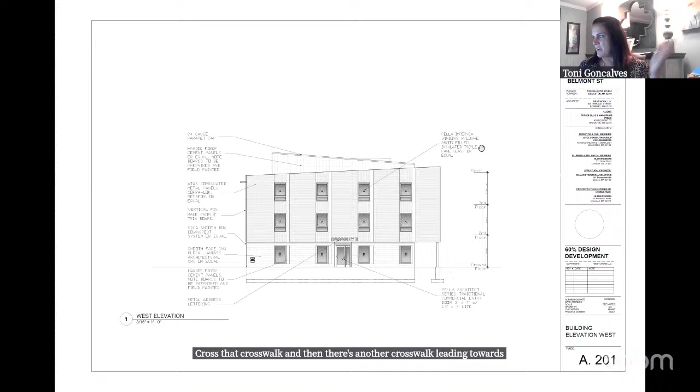And I do see a crosswalk. I just pulled up the aerial view. If these folks need to be trained to take a left out of the building, cross that crosswalk, and then there's another crosswalk leading towards the front of the VA hospital, so they can cross safely. But other than that, Madam Chair, if I could suggest an upgrade to an RRFB beacon at those crosswalks. They're all without cars. They're reliant on walking. So I think a reasonable accommodation for those that walk, especially at one of our biggest intersections, would be to upgrade that with RRFB beacons.

To the existing crosswalks. To the existing crosswalk. Yeah, installing it is the hard part. Upgrading it would be a little bit easier. I think the DPW would tell you better than I would, but that's been my experience. It's already there. You don't need a study, but you probably could upgrade it. And I think that's a reasonable request. I think that crosswalk is in front of Avon Auto Brokers, so direct the residents that way.

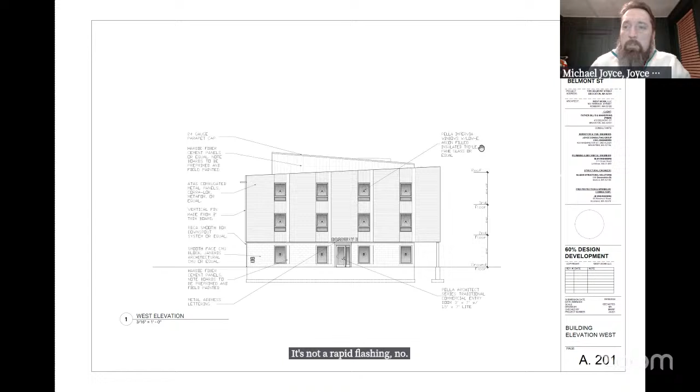I just had a quick question on that. They don't have one there now? The only reason I ask is I know MassDOT upgraded that intersection not too long ago. It's not a rapid flashing, no. Okay, I was just curious. Yeah. It is under MassDOT control. That's something that we can discuss with them. I know that it is a signalized intersection with pedestrian crossing signals, and they generally don't see RRFBs, or rectangular rapid flashing beacons, at signalized intersections.

But there might be something that we can do on the western approach where there's not a crosswalk. That is the easiest path residents might try to take into the Mobil. And one of the reasons why there's not a crosswalk on that section is because it aligns with the current curb cut that goes into the old hotel.

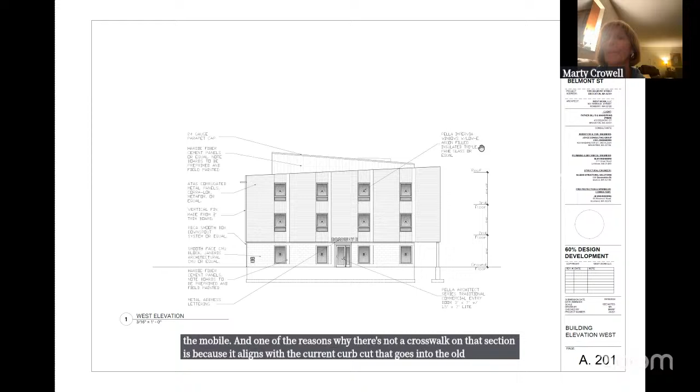That goes into the old hotel. So if that curb cut were to be closed, it might be possible to get a grade crossing or a signal crossing. If you could unshare, I could reshare and just talk about what I was talking about.

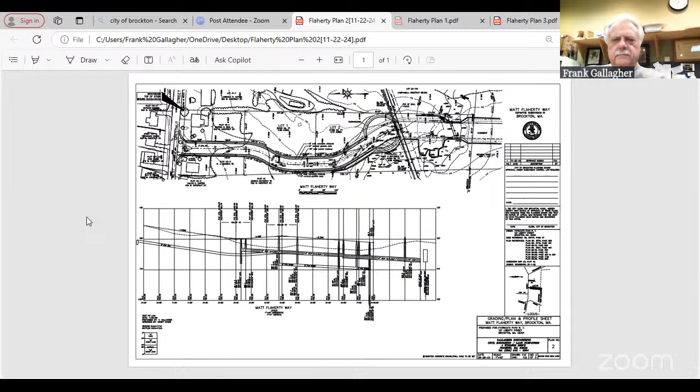Questions from the planning board while I pull out some of my notes. On the subdivision plan, can you, Mr. Gallagher, identify where parcel C or parcel 3 ends, the dividing line between parcel 3 and parcel 2 and lot 2? Let me just... It's a little bit clearer than the engineering plans. Yeah.

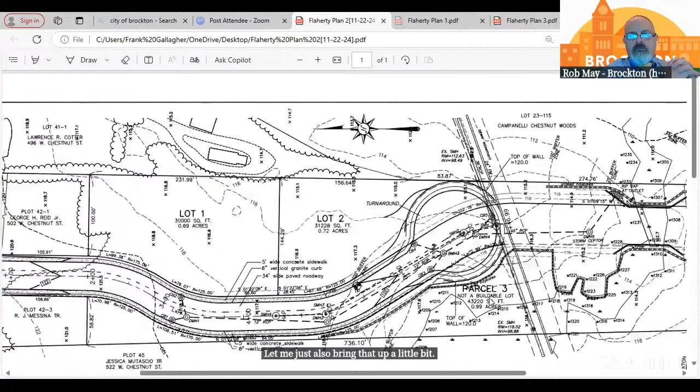Yes, parcel 3 basically extends to this point and follows this line, and then it's everything west of this solid line that I'm tracing right here. So parcel 2 is above it, and lot 2 is above it, and parcel 3 is below it? That's correct. And it extends into this area as well. Yes.

Is that the only issue, the length of the roadway? I don't believe that's the only issue. Well, I've enumerated some issues, and we'll come back to the length of the roadway. There was a question of notice to the city clerk's office. I dropped off a copy of the receipt from the city clerk's office saying what day and what time it was received. I don't know if anybody has been shown that, but it was dropped off at the planning board office, left on Isaiah's desk.

The notice to the West Bridgewater Planning Board, that was addressed in my memo, and I don't think that should be an issue any further. The position that we required a planning board notice to the West Bridgewater Planning Board was based on Chapter 40A, which is zoning and variance and special permitted use, and that doesn't apply here. What applies here is Chapter 41, and that does not require that an adjacent town's planning board be notified, and I don't think there's any gray area there at all.

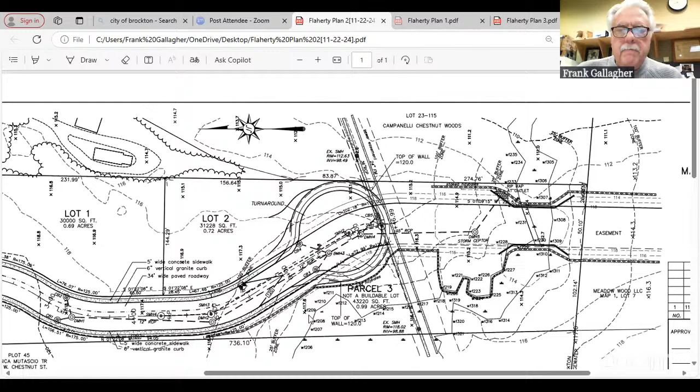Questions from the board members? I'm good. All right, open to public. Oh, here we go. Ladies and gentlemen of the public, if you wish to comment on this proposed subdivision, please use the raise your hand icon and we will unlock your microphones so that you can comment. And I have a P. Lynch that I am allowing to chat. And P. Lynch, would you please identify yourself fully?

Hi, can you hear me? Yes, we can. Okay, so here we go. And for the record, your full name is? Mr. Lynch, for the record, what is your full name? Excuse me. Mr. Lynch, if you want to address the board, we need to know your full name, please. If you can unlock your mic now to give the board your name and continue with your statement. There it is. Got it. Can you hear me now? Yes. All right. Again, my name is Peter Lynch. I live on 31 Chestnut.

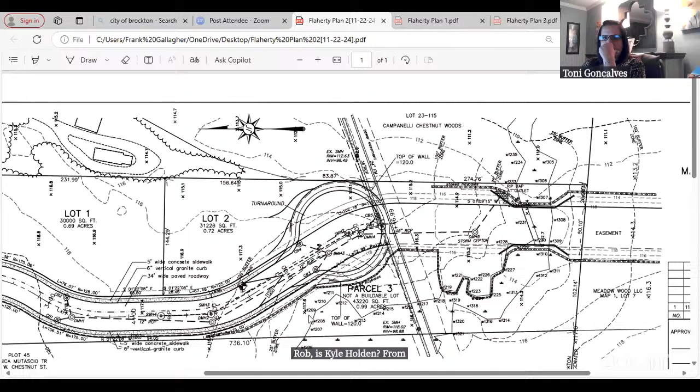Thank you very much, Ms. Jacobson. You're welcome. Rob, is Kyle Holden from Conservation? Kyle is here, but we have one other person from the public, and that's Linda. And I'm going to open up Linda. And Linda, can I get your last name, please? Can you hear me? Yes, we can hear you. Okay, Linda Lynch. Thank you, Linda.

You're welcome. I just wanted to expand upon something that Peter Lynch said. When this all started and we became involved, and I outlined this in a letter to the planning board, but I'll be very brief about it. The project was approved for the 700 feet, but what the applicant left out was all of the subsequent things that happened. One of which was, once he received the 700-foot approval, he retracted the 2 or 3 houses that he was going to build and then tagged on another 286 feet, because the project went from 700 feet and then subsequent to approval, it was 986 feet.

We were at every meeting. We've attended every West Bridgewater meeting. He likes to say things in one town, but not in the other. So residents have to be running back and forth to be sure that they're accurate. And in West Bridgewater, they've refused approval because they need a road from Brockton. But the other thing is, for those of you who have not attended the West Bridgewater meetings, there are other families involved in this, not in this particular project, but that's the overall situation that we've all dealt with over the last several years.

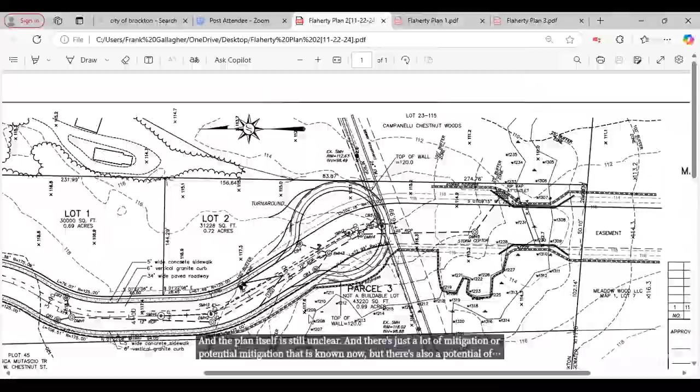And there's just a lot of mitigation or potential mitigation that is known now, but there's also a potential of some mitigation down the road that we might not be quite aware of at this present time. So for those reasons, I urge you to deny this. Thank you very much. Thank you, Councilor Griffin.

Madam Chair, I do not see anyone else with their hand raised at this time. So this is last call if you'd like to speak. Oh, sorry, Councilor Castro, please excuse me, I didn't see your hand. Eli, one moment too. I don't know if you're going to consider Kyle part of the public, but please add him after Councilor Castro goes. Thank you. Yes, if the board has questions for Kyle, I'm happy to let Kyle go first.

Kyle, the board has some questions for you, so jump in. Sure, yeah. For the record, this is Kyle Holden, conservation agent for the city of Brockton. Here really just to answer any questions the board has concerning this project from the Conservation Commission angle. So please ask away. Well, I actually thought that you had some new information for us, since I think the last time this was reviewed by Conservation was 2016.

Yeah, so just a broad summary, the Conservation Commission issued an order of conditions for this project in 2017. That original order, the plan that was approved in 2017, is still active. The applicant received one extension from the Conservation Commission, and then through the COVID tolling, and most recently the governor's extension of land use permits on November 20th of 2024, that extends the original order of conditions from 2017 to current time. I believe 2025 is the current expiration date for that 2017 order of conditions.